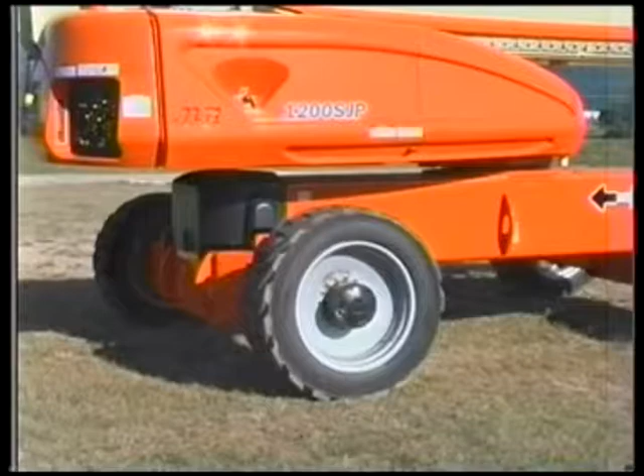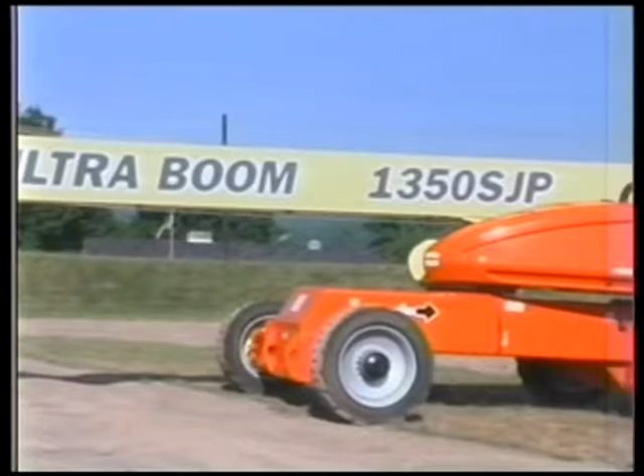JLG's Ultra Boom series includes the new 1200 SJP and 1350 SJP models of telescopic boom lifts. These models incorporate unique functional characteristics that are revolutionary to the big boom market. The purpose of this video is to inform the user of these unique characteristics. This video is to supplement the operator safety video and the operator and safety manuals.

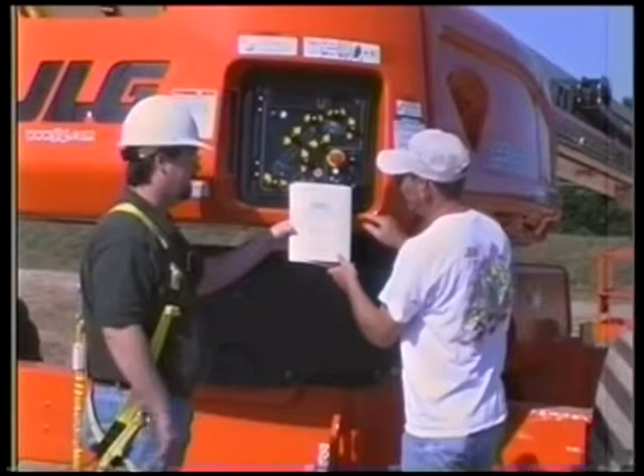The operator of a JLG boom lift must not operate the machine until the operator and safety manual has been read and understood, training has been accomplished, and the operation of the machine has been completed under the supervision of an experienced and qualified operator.

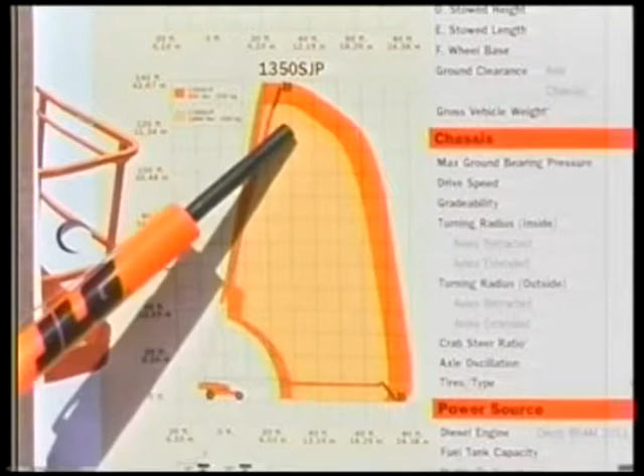The envelope control system is the primary means of controlling the stability of the machine by restricting the working envelope of the boom. The system continuously monitors the angle and length of the boom to keep the unit within the permitted working envelope.

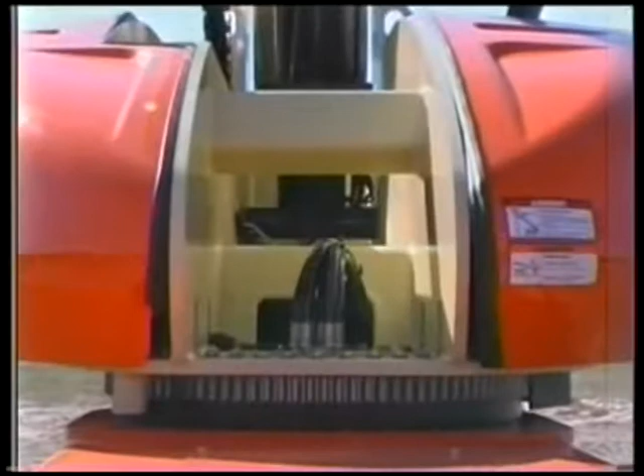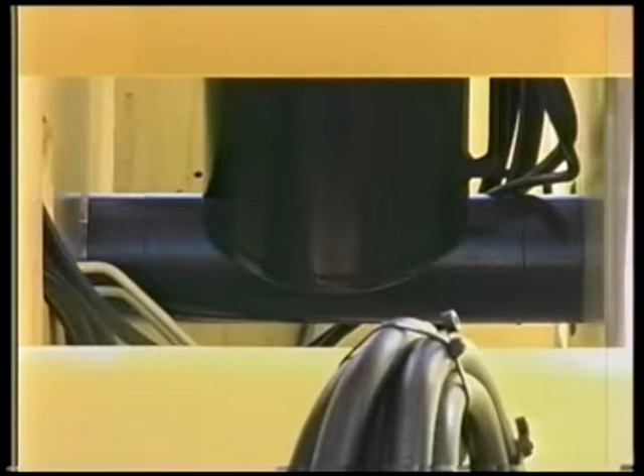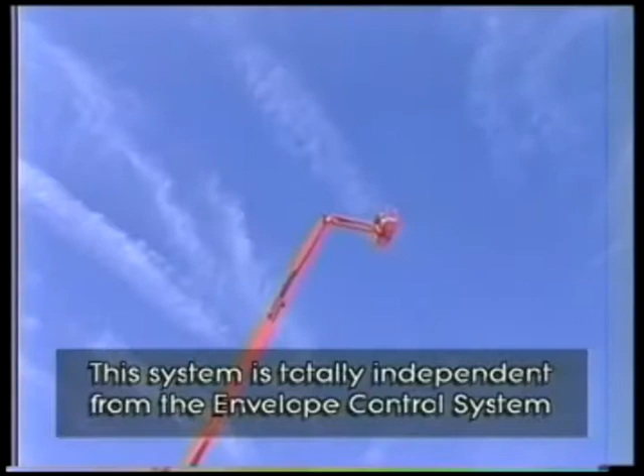The moment control system is the secondary means of controlling the stability of the machine. This system measures the forces applied to the lift cylinder pin and compares it to predetermined parameters. As the boom is moved, the forces on the pin change, provided the boom is off the boom rest. When the system sees forces in the forward stability region or the backward stability region that approach the predetermined parameters, the system will restrict or reduce the appropriate functions.

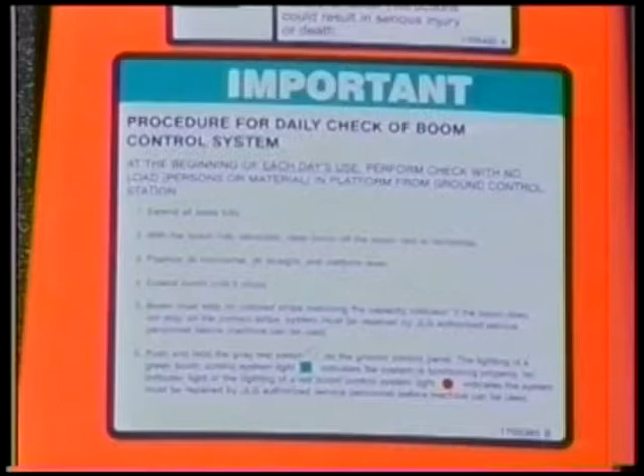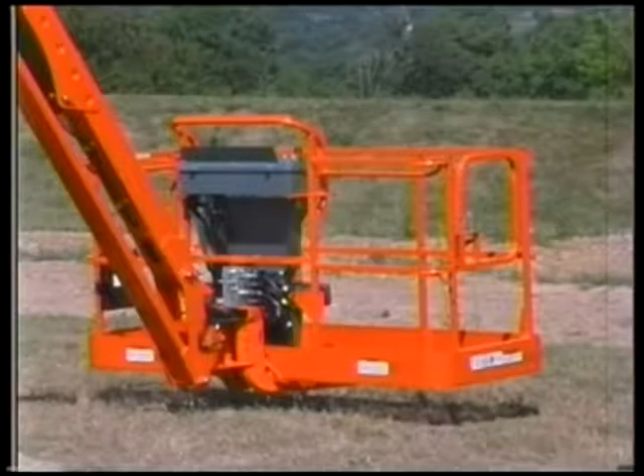To verify the proper operation of the envelope control system and the moment control system, the machine has a boom control system daily functional check. To perform this check, place the machine on a firm and level surface with no load, persons, or material in the platform and extend the axles fully. From the ground control station, fully retract and lift the boom off of the boom rest to the horizontal position. Position the jib horizontal, straight, and the platform level.

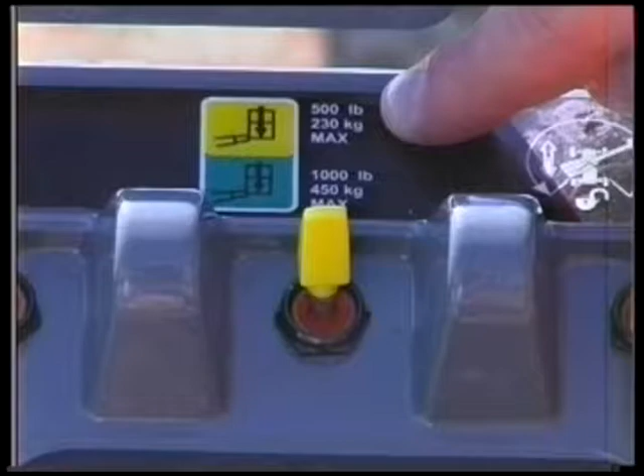Extend the boom until it stops. The boom must stop on the colored stripe matching the capacity indicator. The colored stripes are located underneath the inner mid boom. If the boom does not stop on the colored stripe matching the platform capacity previously selected from the platform controls, green for 1,000 pounds or 450 kilograms, and yellow for 500 pounds or 230 kilograms, then the system must be repaired by a JLG authorized service person before the machine can be used.

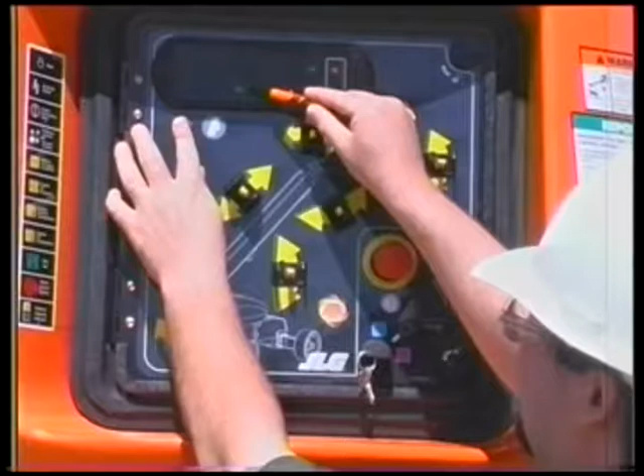Next, push and hold the gray test switch on the ground control panel. The lighting of the green boom control system light indicates the system is functioning properly. If no indicator light illuminates, or the red boom control system light illuminates, the system must be repaired by a JLG authorized service person before the machine can be used.

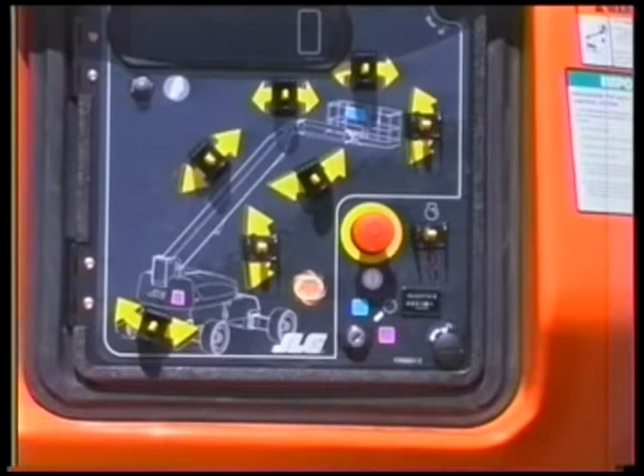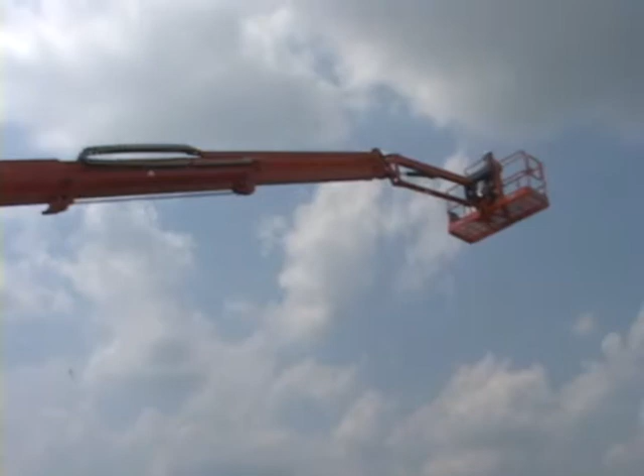The boom control select switch allows the operator to choose between automatic or manual boom control. The automatic boom control provides a sweeping work envelope arc. When it's selected, the lift and telescope functions are coordinated by the JLG control system. While operating lift up, the boom will telescope out when necessary, and while operating lift down, the boom will telescope in when necessary. While operating at a high boom angle and telescope in is activated, the boom will lift down when necessary. The automatic platform leveling feature is only active during lift, swing, and drive movements.

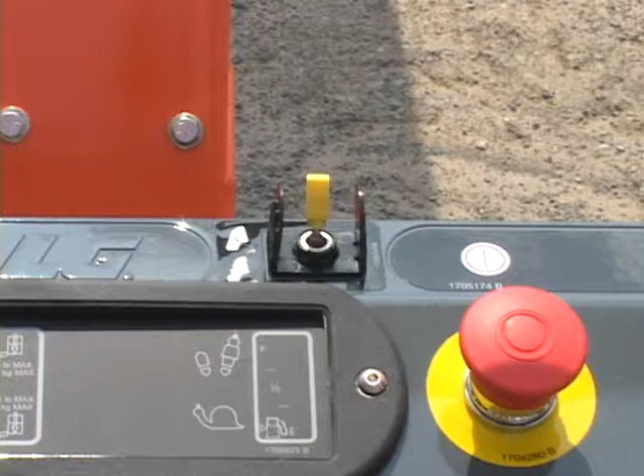The manual boom control allows the operator full control of all boom functions for more precise platform positioning. When it is selected, the lift and telescope movements are controlled separately by the operator, and the automatic platform leveling feature is active only during lift functions. When positioned to manual boom control, boom functions will be stopped when the envelope limits are reached. When this occurs, operate a different function or select the automatic position.

The controlled arc system optimizes the envelope shape by automatically introducing telescope in or out during the lift commands when the switch is in the automatic position. Telescope commands are regulated to maintain a constant percentage of the boom length from the start of the lift command or the end of the telescope command. For example, if an operator has the boom telescoped completely in, 0% extension, and operates the lift up or down function, the boom will remain telescoped completely in, 0%, until the telescope function is activated.

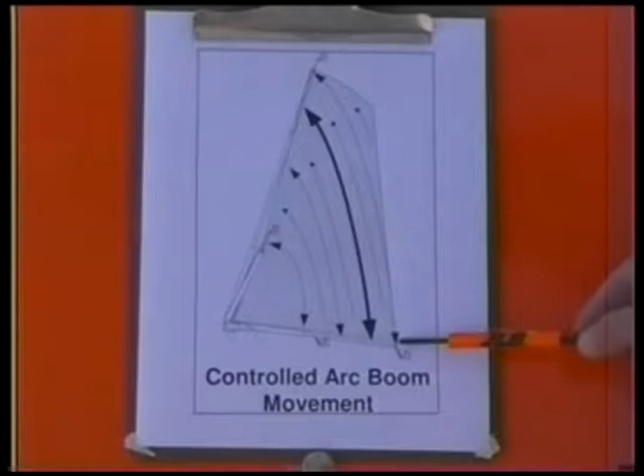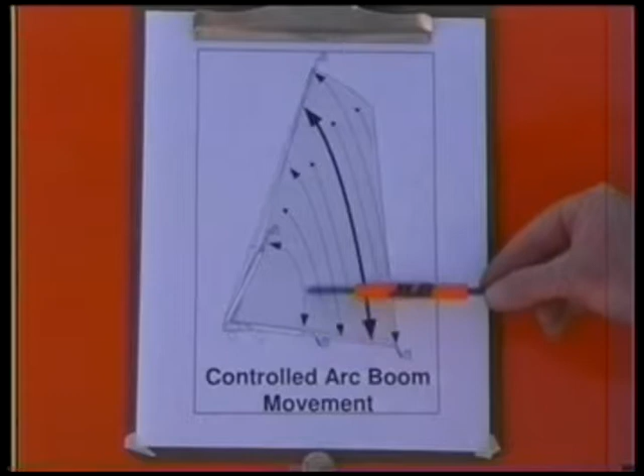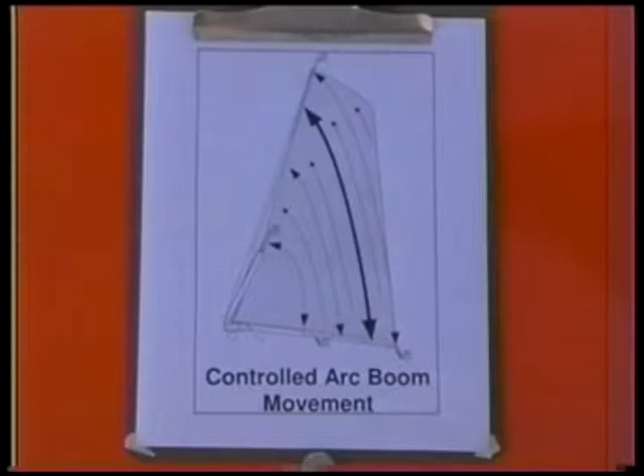If the operator completely extends the boom, 100% of the allowable extension, at the horizontal position and operates the lift up function, the system will automatically telescope out until the boom reaches 100% of the total height. The desired percentage will be maintained throughout the lift, up or down, whether it is maintaining 0%, 100%, or any percentage in between. The telescope function can still be operated independently.

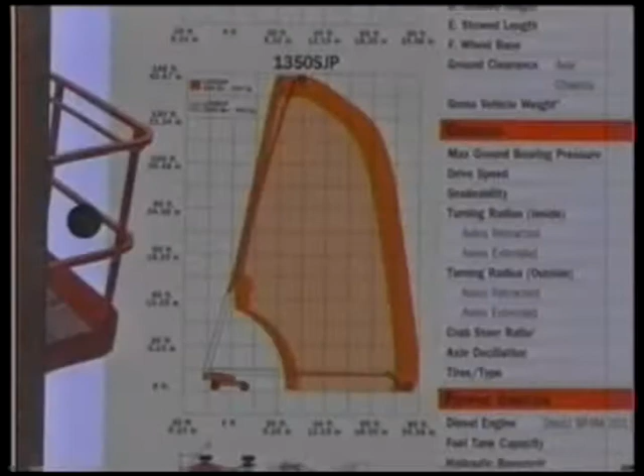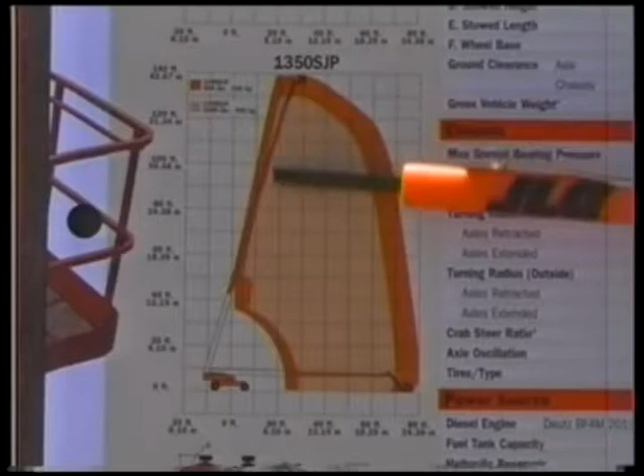To maintain unrestricted operation of the boom while tracking the backward edge of the working envelope, the lift down function is automatically introduced while telescoping in. This only occurs when telescoping in along the backward edge and is not used elsewhere within the working envelope or when telescoping out.

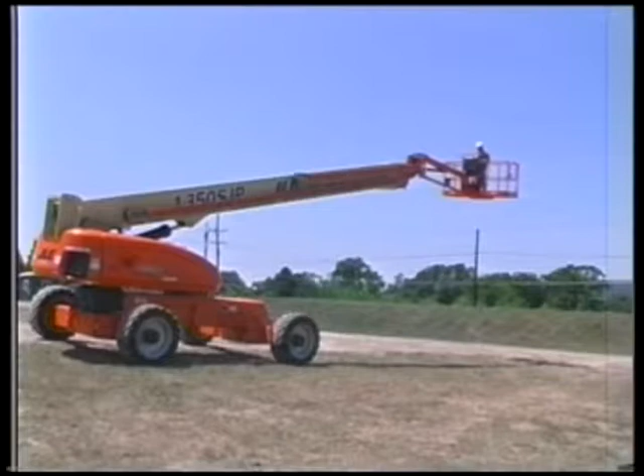If the boom angle is greater than 9 degrees, the controlled boom angle system automatically lifts up and lifts down while driving or swinging over uneven terrain to maintain a constant boom angle relative to gravity. A new set point angle will be taken with the start of each drive or lift command.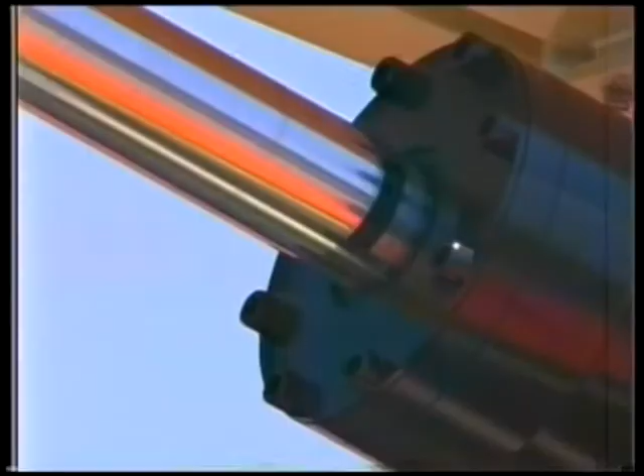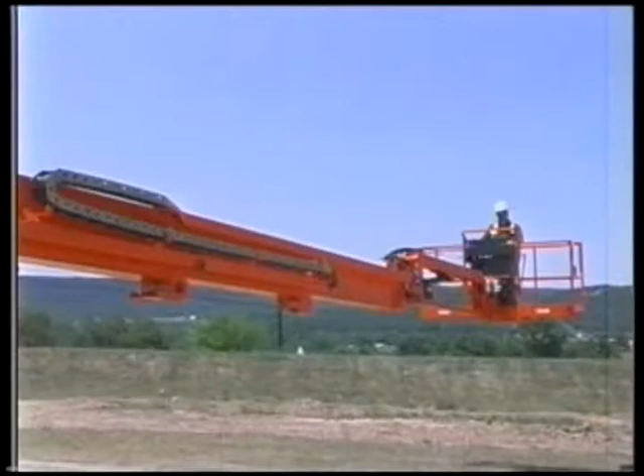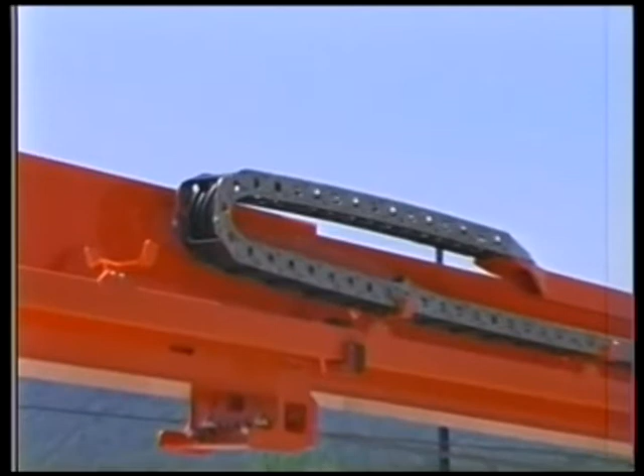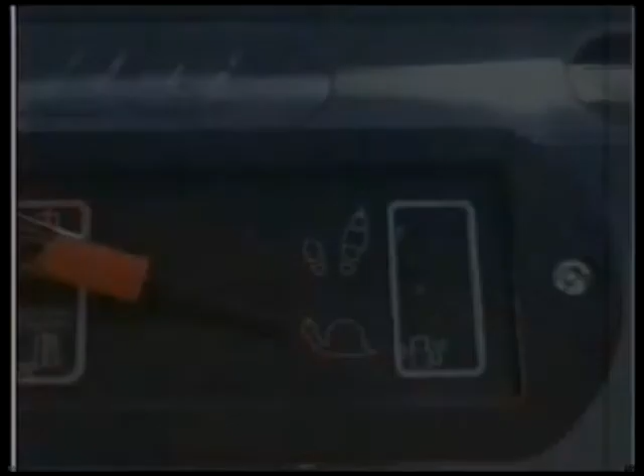When the boom approaches the edges of the working envelope, all functions except for the jib and platform functions, telescope in or out on the backward edge, and telescope in on the forward edge, are automatically slowed down. The slowdown starts within 4 feet or 122 centimeters from all edges and is at the fully reduced speed at 2 feet or 61 centimeters from all edges. The control system indicates to the operator this automatic introduction of the slowdown by flashing the creep indicator light on the platform display panel.

The unit is out of the transport position whenever the boom is elevated above 15 degrees relative to gravity and/or the boom is extended 1 foot or 30.5 centimeters on the 1350 model and 2 feet or 61 centimeters on the 1200 model. When the boom is out of the transport position, the drive speed is cut back, the extension and retraction of the axles is prohibited, the oscillating axles are locked, and the jib stow system is disabled.

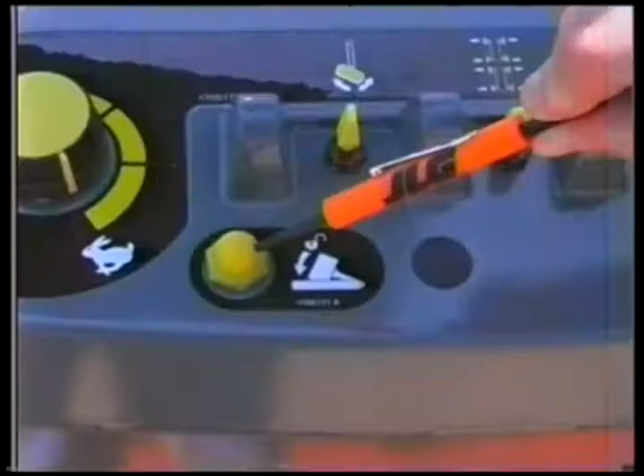Swing speed proportioning controls the speed of the turntable swing function. Turntable swing speed is decreased as the boom is extended. This results in an approximate constant platform speed regardless of boom position.

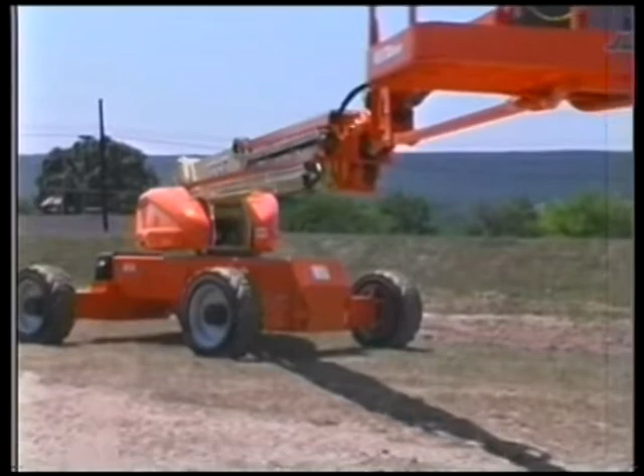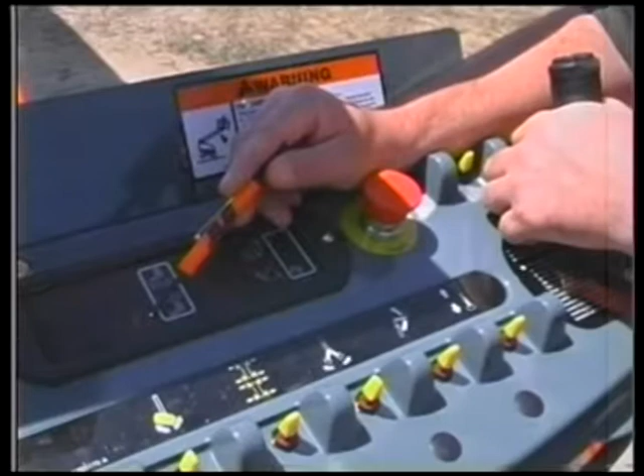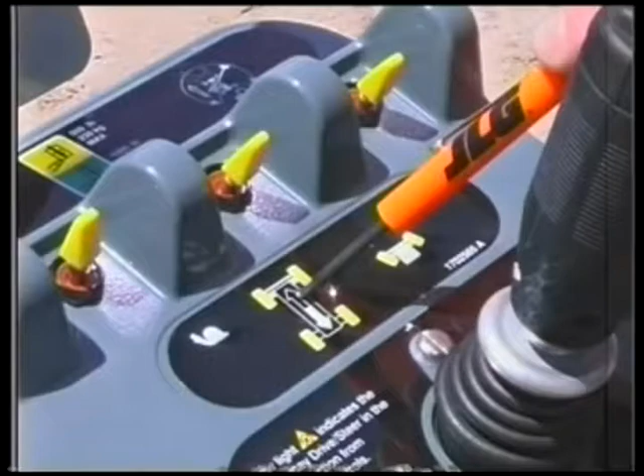The drive orientation system activates whenever the turntable is swung past the rear drive wheels from the normal driving position. When drive is initiated past the rear drive wheels, the drive orientation indicator will flash and the steer and drive functions will be disabled. To drive the unit in this position, match the directional arrow on the frame with the directional arrow at the drive controller to the intended direction of travel. Engage the drive orientation override switch and slowly move the drive controller to the intended direction of travel.

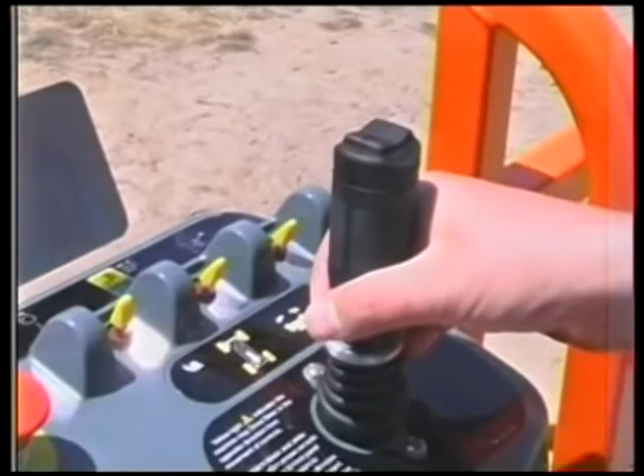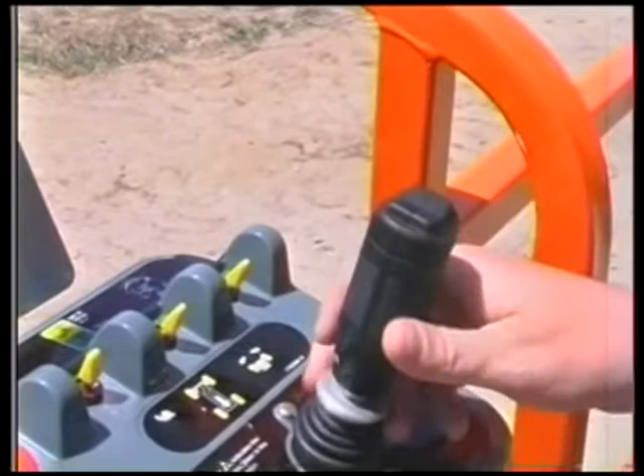The drive orientation override switch has a 3-second enable timer. If the timer expires, the override switch must be re-engaged to enable the drive and steer functions.

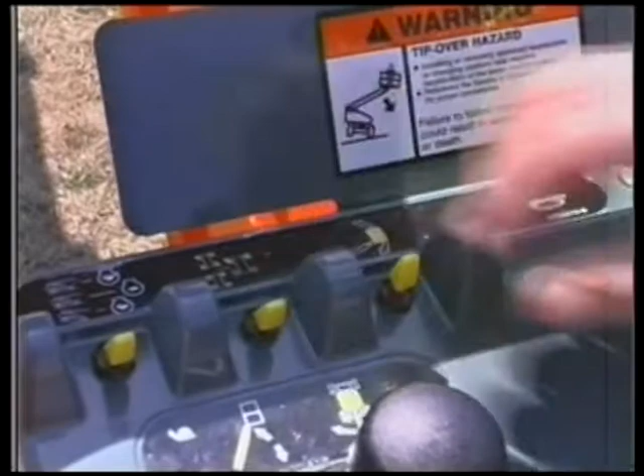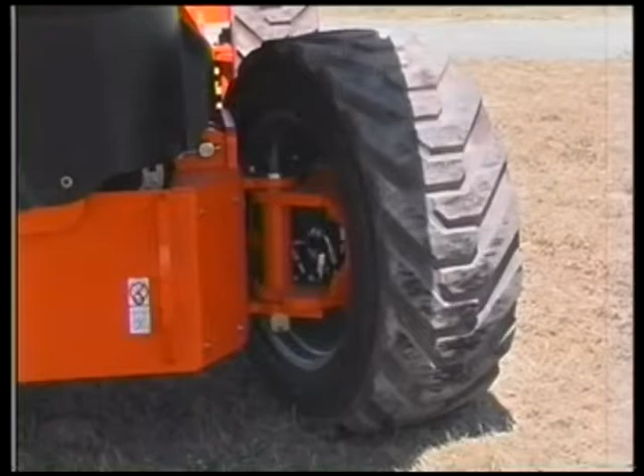There are 3 different modes of steering, selectable by positioning the steer select switch on the platform control panel. They are crab, coordinated, and conventional 2-wheel steering. Changing the steering modes while the foot switch is depressed causes the wheels to automatically adjust to the appropriate angle for the selected steering mode, based on the position of the inside front wheel. The system also automatically changes the maximum steer angle, 25 degrees with the axles retracted, to 45 degrees with the axles extended.

This system proportionally varies the drive speed based on the turning radius of the chassis for both coordinated and conventional 2-wheel steer modes. The tighter the turning radius, the slower the allowable drive speed. Crab steer does not steer on a radius, therefore full drive speed is maintained regardless of steer angle.

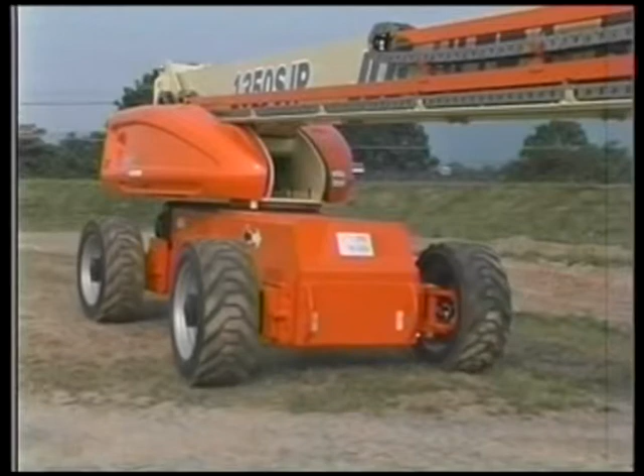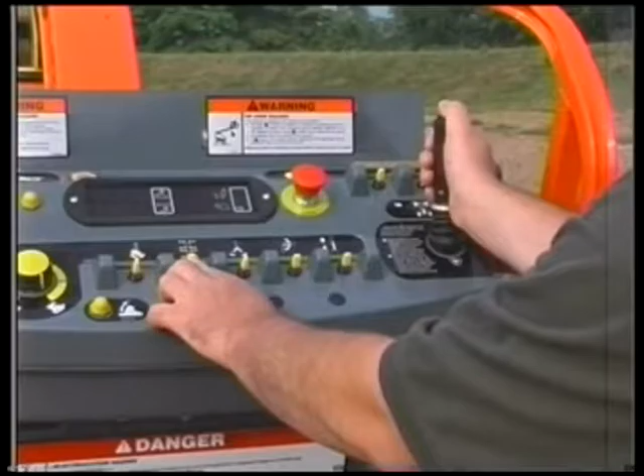The axle extension system allows each of the 4 axles to be extended and retracted together while maintaining steering control as the machine is driven. The system allows the axles to extend or retract only while the boom is in the transport position. To extend or retract the axles, engage the axle extend or retract switch and the drive controller at the same time. The axle set indicator will be off when the axles are not fully extended. The indicator will flash while the axles are being extended or retracted, and will be on constantly when the axles are fully extended.

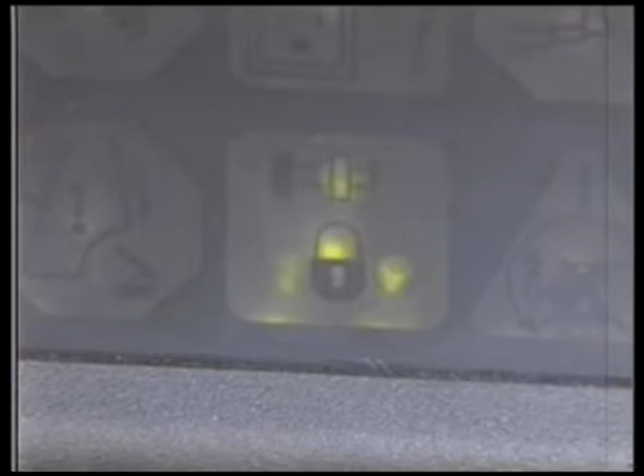The oscillating front axle system allows all 4 wheels to remain on the ground while traveling over rough terrain. The lockout cylinders permit axle oscillation when the boom is in the transport position and drive is commanded. The lockout cylinders will lock and hold the axle when drive is not commanded or when the boom is outside the transport position.

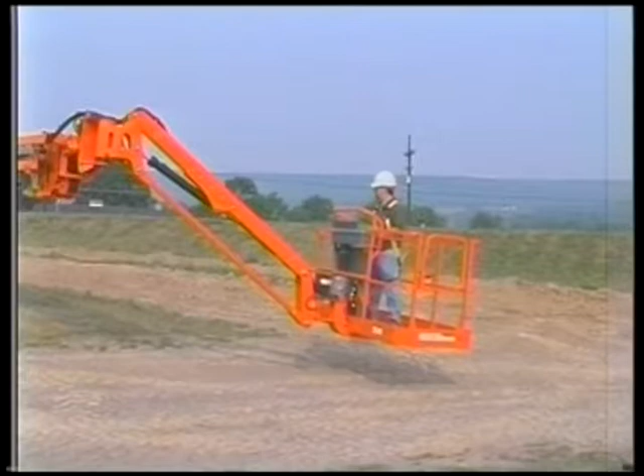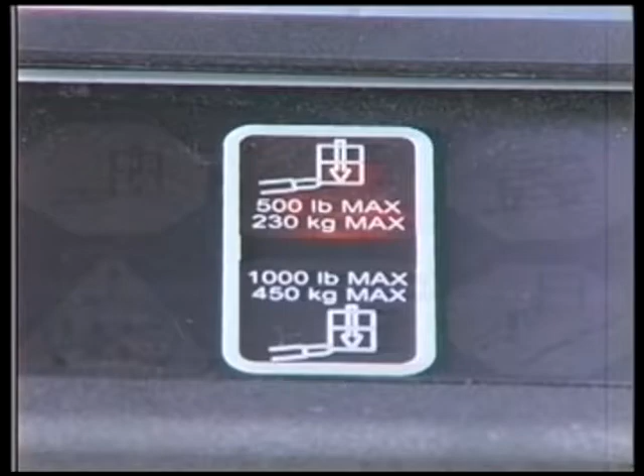Both the 1200 SJP and the 1350 SJP units are equipped with a full functional side swing jib that is operational only if the 500-pound, 230-kilogram capacity mode is selected. The machine's stowed length can be reduced for transportation by swinging the jib farther to the right by using the hydraulic power of the side swing rotator.

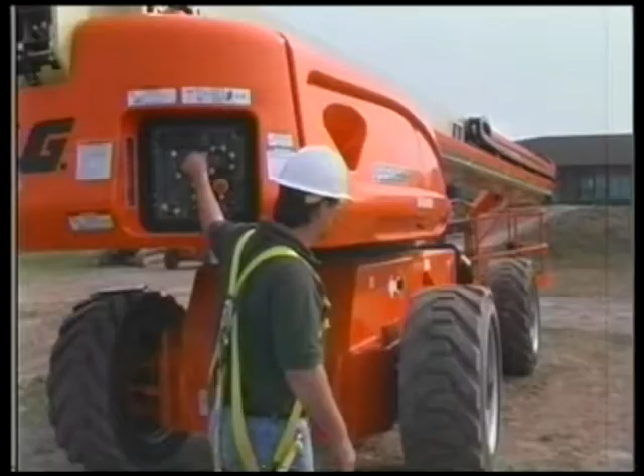To stow the jib, the boom must be in the transport position and the axles retracted. Press and hold the jib stow override button while activating the jib swing right function switch. When the jib is in the stowed position, jib swing will be disallowed from the ground control station. Note, the turntable lock is located off-center to allow the stowed platform to be confined within the same plane as the drive wheels for transportation purposes.

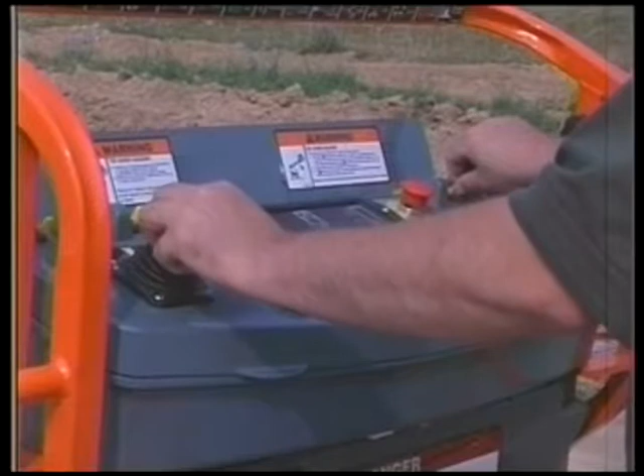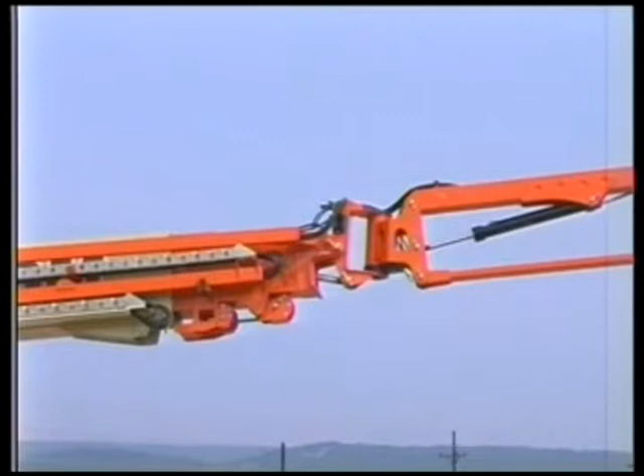The auxiliary power system is intended as a secondary means of moving the boom in case of a power loss. During the lift up or down functions, no other functions are permitted. While using the lift down function, telescope in will automatically activate until the boom is retracted to the transport length. Then, the lift down function will continue until the boom is fully lowered.

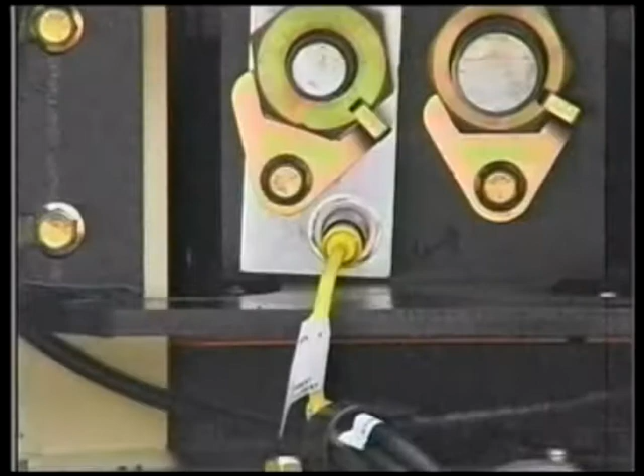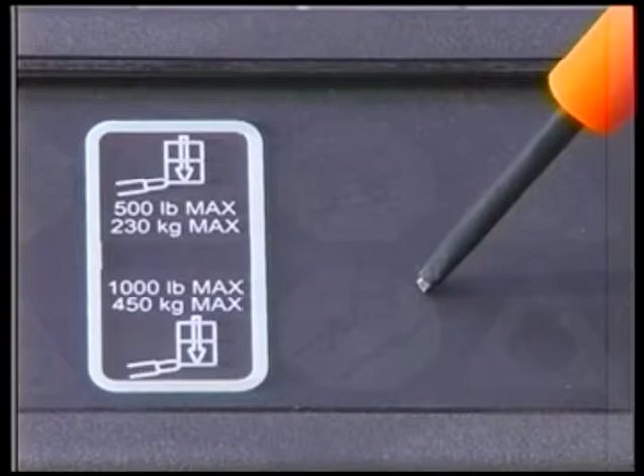The cable service indicator system uses a proximity switch to detect excessive movement of the cable block. If movement is detected, the cable service indicator will illuminate at the platform control panel. No restrictions are made to the functionality of the control system, so the cable service system must be repaired, replaced, or adjusted immediately upon indication.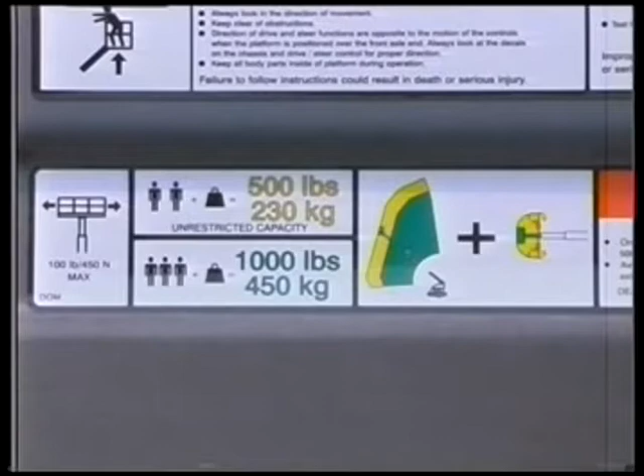The dual capacity system on this machine is a multiple envelope control system as opposed to an indication system. The control system changes the working envelope and moment limits to match the capacity select mode to either the 500-pound, 230 kilograms mode or the 1,000-pound, 450 kilograms mode. It then displays the capacity mode on the platform and ground display panels and controls the position of the boom within the allowable envelope for that mode.

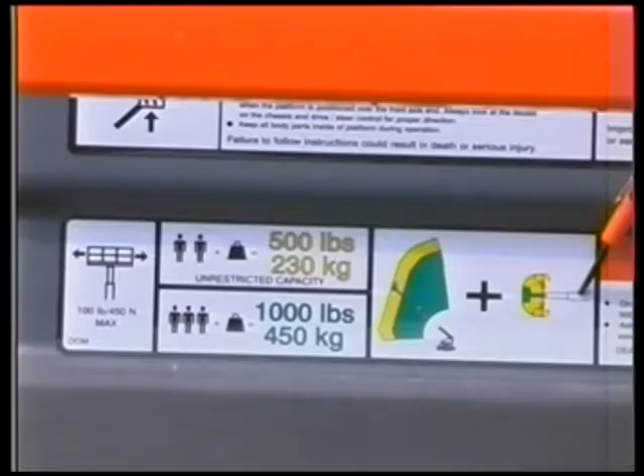This mode is selectable by the operator with the dual capacity select switch on the platform control panel. The 500-pound, 230 kilogram mode has the largest envelope and allows the use of the side swing jib. The 1,000-pound, 450 kilogram mode has a smaller envelope and requires the jib to be fixed in a centered position. To select the 1,000-pound, 450 kilogram mode, the boom must already be in the smaller 1,000-pound, 450 kilograms envelope, and the jib must be in line with the main boom.

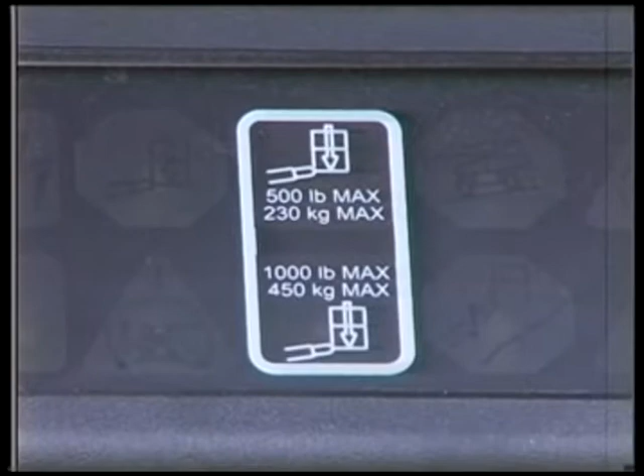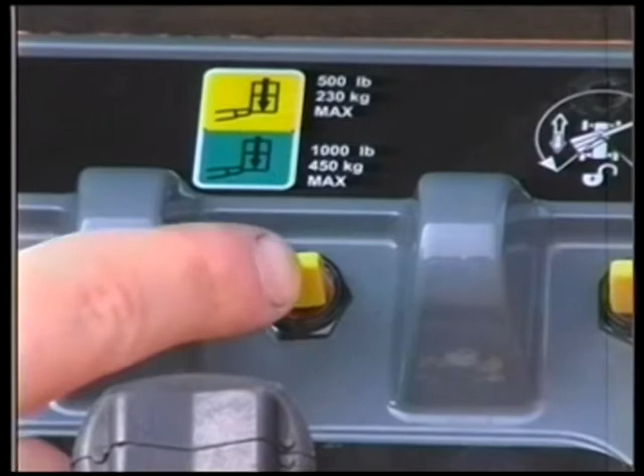When the operator selects the 1,000-pound, 450 kilogram mode, and these conditions are not met, both capacity lights will flash and the platform alarm will sound, and all functions except jib swing will be disabled until the capacity select switch is put back into the 500-pound, 230 kilogram position. Operation of the jib swing in this position can be used to find the center position of the jib, and the jib swing function will stop when the center position is reached.

The electronic platform leveling system automatically levels the platform while operating the drive, telescope, lift, or swing functions. The system controls the platform angle relative to gravity using a set point established during power-up or at the conclusion of the manual platform level override from either the platform or ground controls.

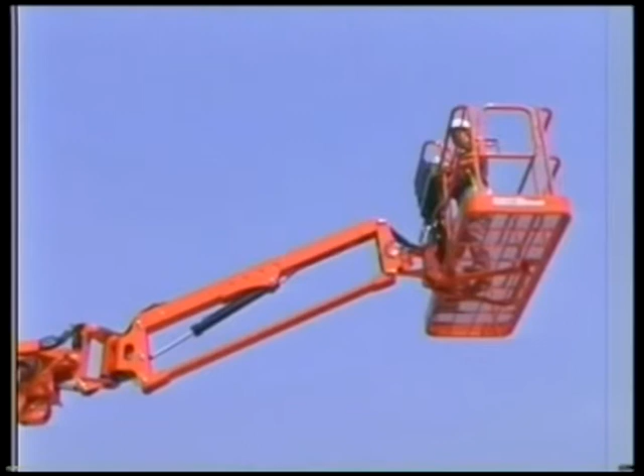The jib cylinder has an orifice installed that restricts the oil flow while raising the jib. When the jib reaches within 5 degrees of maximum elevation, this restriction slows the jib lift up speed.

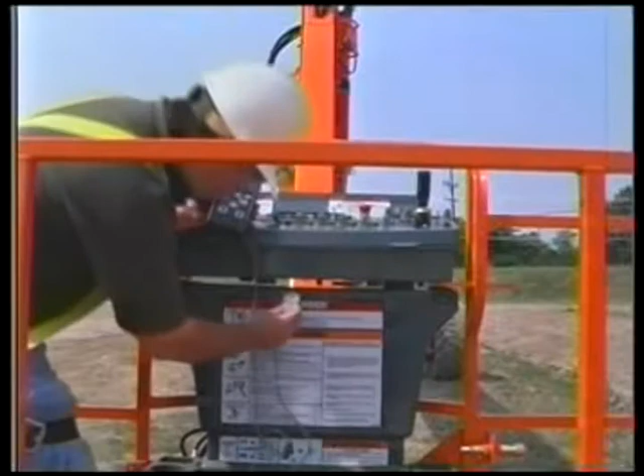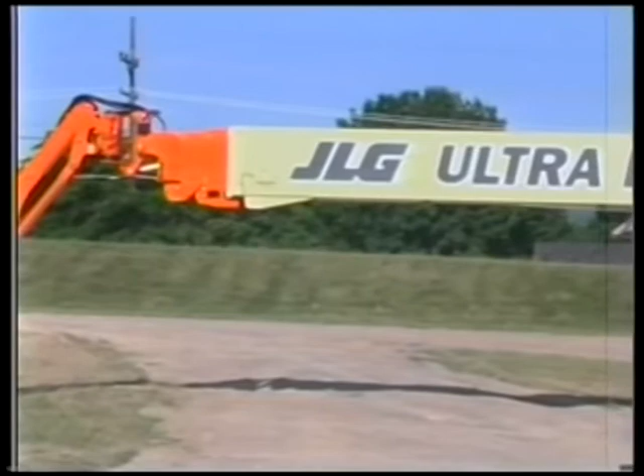JLG's control system uses a handheld analyzer for machine setup, calibration, personality adjustments, and diagnostics. This concludes the Ultra Series Unique Function Characteristics video.